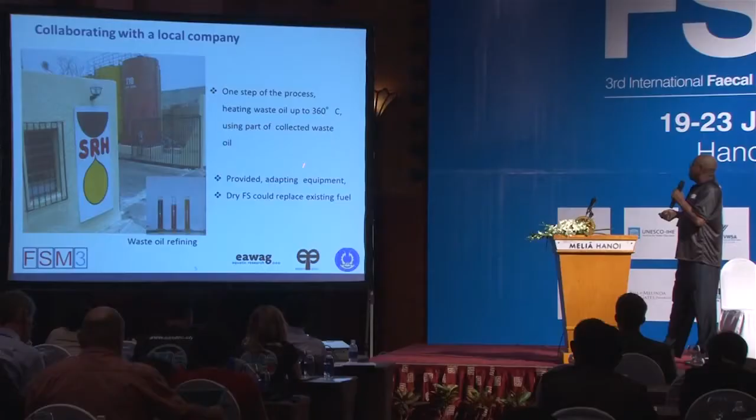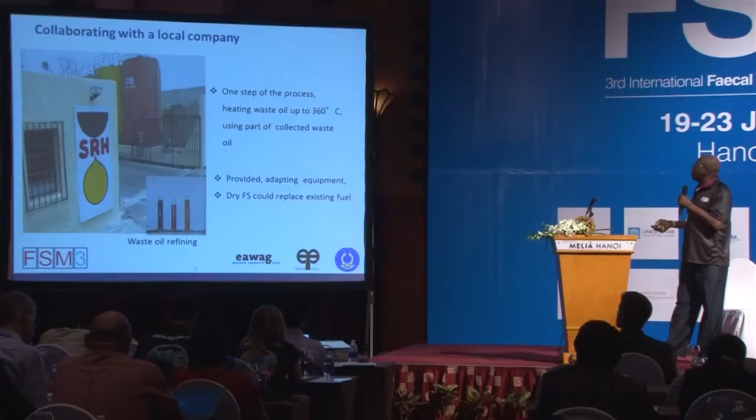To do that, we tried to design, and we designed to achieve our goal. We designed a kit - that is the first design we did. We have here a container that...

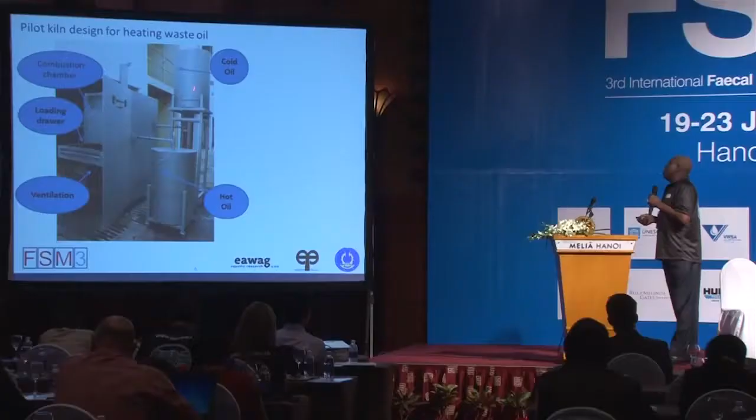...is filled with cold oil, the waste oil, and this is the second container which is collecting the oil that is heated. We have here our chamber of combustion drawer where we put our dry sludge, and we have ventilation to ventilate the process.

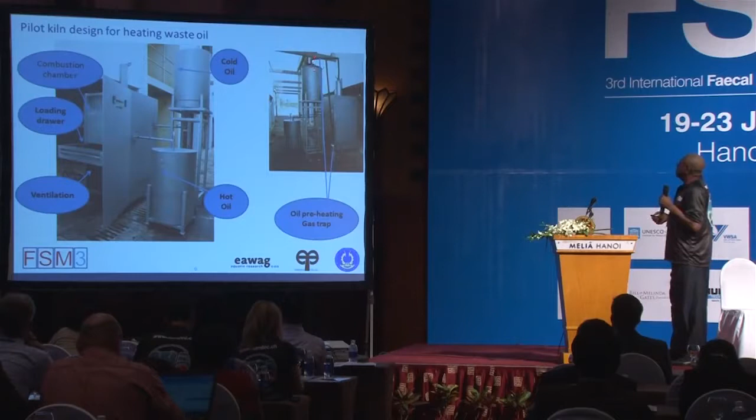But then, after few trials, we saw we need to perform our kiln, because we needed to have the oil preheated so that the flow can go easily inside the kiln. To do that, we needed to capture part of the fumes and direct it to the first container. We also wanted to measure the gas or the fumes we have out of the combustion.

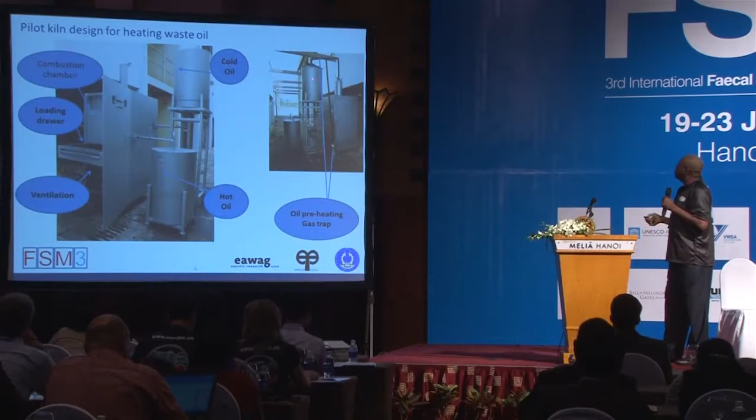Then we designed this bottle to capture the fumes, so that we can measure what is going out.

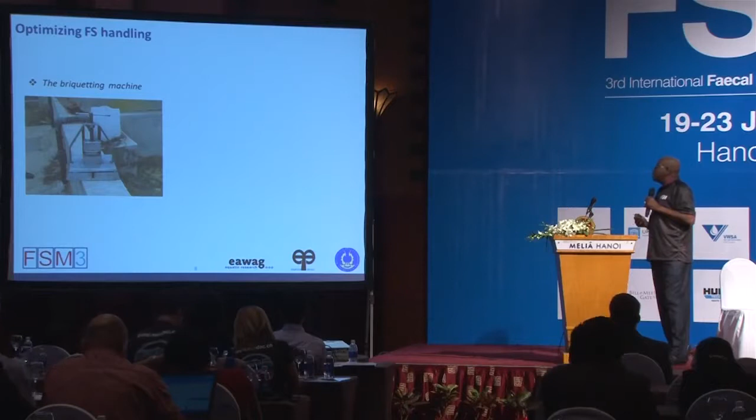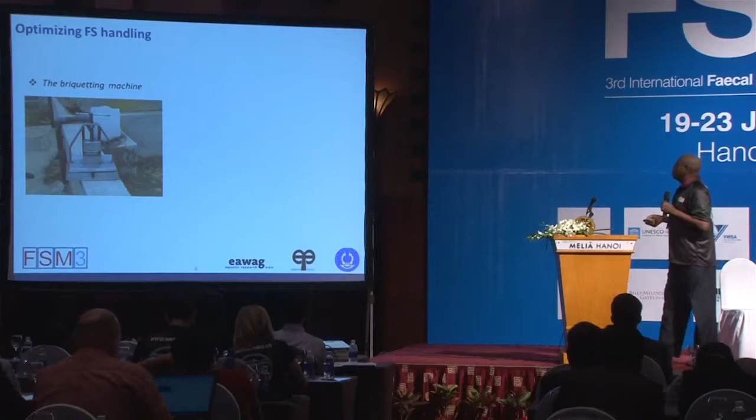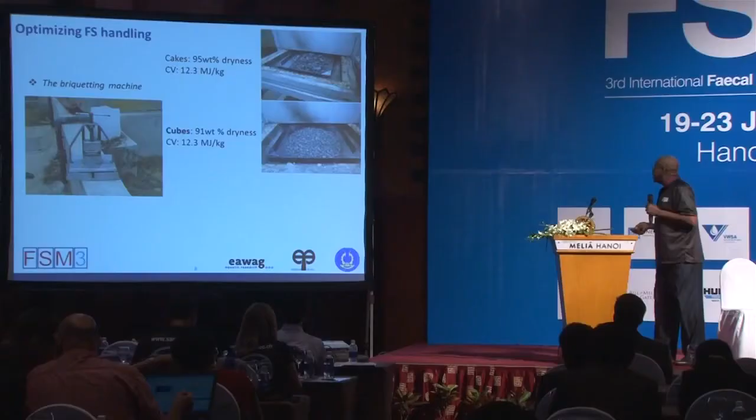We saw also that if we want to target, if we want to have these companies with us on board, we need to handle nicely our fecal sludge. This is why we tried to set up a briquetting machine, so that - this is how our fecal sludge looks if it is not treated, and this is how it looks like when we do our briquetting. We have this kind of form, cubes, and we have briquettes.

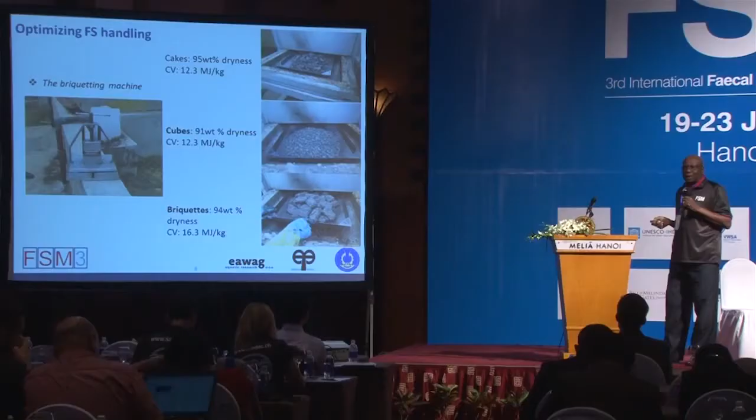We measure also the calorific value of those forms, so that we can see if the different forms we have could impact the combustion capacity or the combustion results.

This is what we had when we put in our kiln 5 kilograms of fecal sludge. We burn them for 1 hour in the kiln. We've seen that we compare the combustion of our fecal sludge to combustion of charcoal in our kiln.

We've seen that for our fecal sludge, we could reach almost 300 degrees, and we could sustain this temperature for about 20 minutes in the kiln.

These are the two ways of measurement of temperature we did. We measured the temperature on the top of the kiln, and measured also on the bottom of the kiln. We also measured temperature variation inside the oil, inside the kiln.

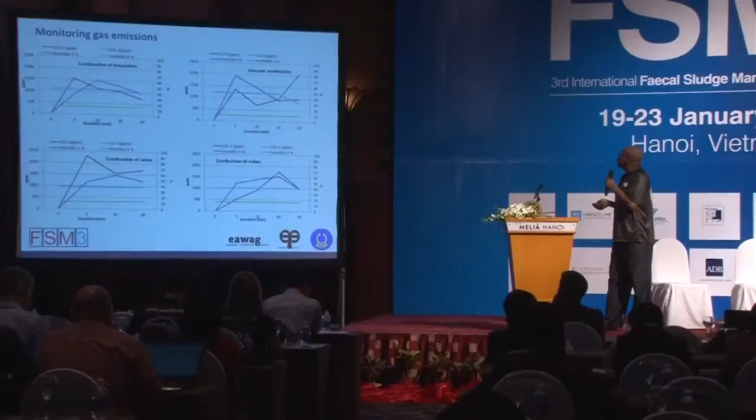That means we are contaminating the environment less than when we burn charcoal.

In conclusion, this has demonstrated that fecal sludge can be used as a viable solid fuel. Performance of combustion of fecal sludge is comparable to charcoal. Fecal sludge combustion performed well for greenhouse gases - CO2 and humidity produced during the combustion of fecal sludge are less than charcoal.

Cement industries, waste oil generation, ovens for bakeries constitute a significant market that would provide incentives to production, transport, and treatment of fecal sludge.

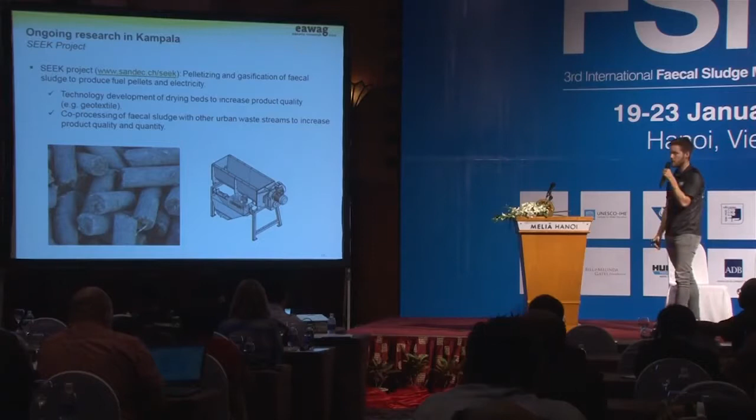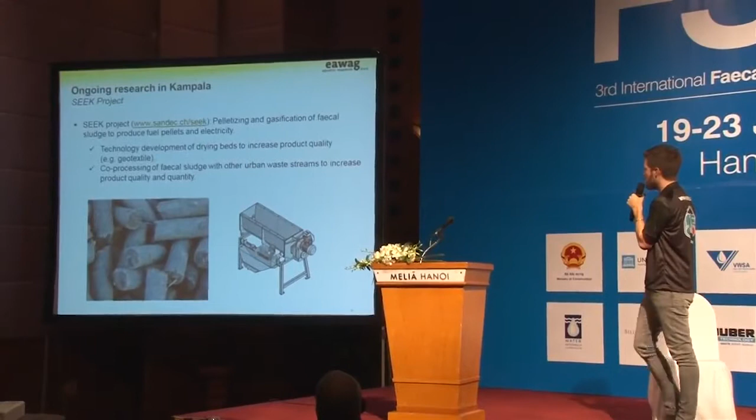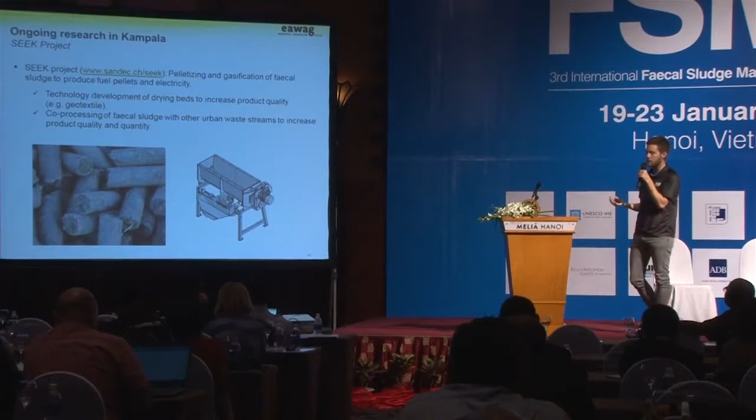And gasification, simply because we made some calculations and think that has a higher product price compared to fecal sludge as a dry fuel only, so it increases the product price. As mentioned in the previous presentation, we're also looking into co-processing of fecal sludge and other waste streams, to increase both fuel quantities and fuel quality. That's something I also got from the first presentation, that we need to co-manage different waste streams to have fecal sludge management or waste management at scale.

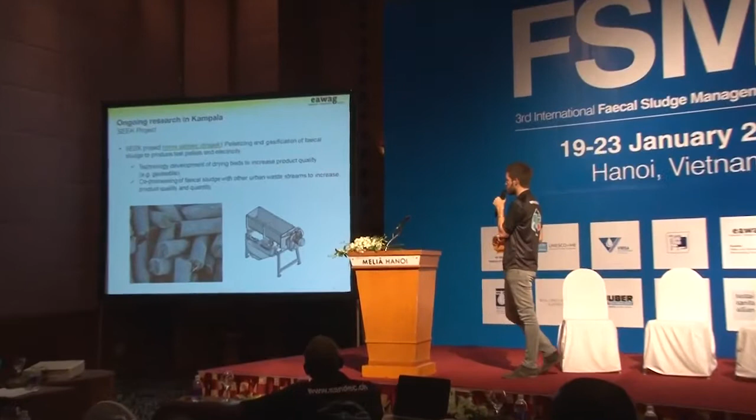I'd like to thank all our project partners, both in Uganda and Senegal, and the funding supplied by Splash, Synthesis and REPIC. I'd like to highlight the resources Sandec is providing. All of which are presented here, and what Senta presented before, is available on the Sandec webpage, and we also have a Sandec YouTube channel where we last week published a video about the project. Thank you.

Thank you, Moritz, for a very interesting presentation. I'd like to invite a few questions, two or three, for Moritz, and then briefly have a panel discussion. It shows how all the different topics are interrelated. We'll take a couple questions from Moritz, and then have Senta, Seydou, and Moritz all come together. I see Allison already has a question in the back.

I was really pleased to see the results you got from the bricks once you finally optimised the system, but you said you had to make some modifications to the kiln to get to that stage. Can you expand a bit on what those were?

Thanks, Alice, for that question. I wasn't directly involved, but I think it had to do with controlling the heat in the kiln via a mechanism in the chimney. Before, the heat generated in the kiln was just directly going out of the chimney, and then they added a metal plate where they could control the heat in the chimney. I think that's the change they made.